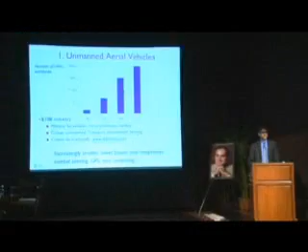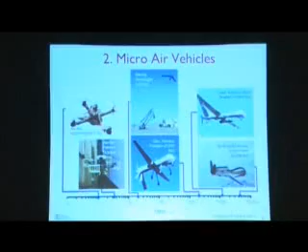The second driver for this work comes from the fact that these UAVs are getting smaller. So in this picture, you see on the right side the big monolithic aircraft used for military applications. But on the left side, you see UAVs that we're developing. So these are handheld UAVs ranging from about 1 meter in diameter all the way down to 20 centimeters or so, weighing about 2 kilos on the high end, all the way down to 75 grams at the lower end.

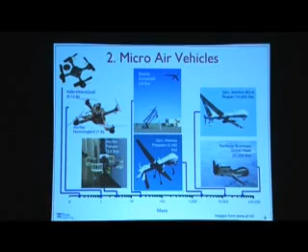The third driver of this work really comes from the fact, and Mr. Gandhi talked about this, there's not only networks of people, but networks of robots. And what I mean by that is really applications with large numbers of network computers, network sensors, network processors, and machines. And you can see it in autonomous platooning by Volvo. They're developing commercial fleets that are unmanned. Certainly in military applications, mining applications, manufacturing applications.

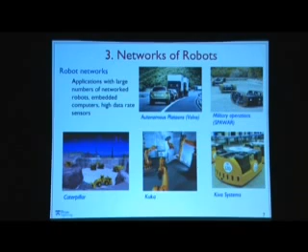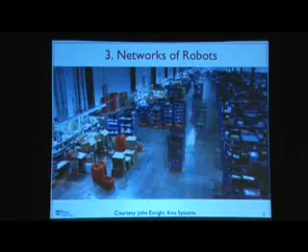My favorite, though, is this example from Kiva Systems. And let me play you this video where you're going to see hundreds of robots in a warehouse. And some of you may know that Amazon recently bought out Kiva Systems. So these robots are able to autonomously navigate, coordinate actions to avoid collisions. When a human operator, you see the person on the top, on the left side of the screen, you saw that a minute ago.

When that person asks for an order to be filled in this warehouse, she does not know which robot is going to respond, what pod has her order, how that robot is going to go to the pod, pick it up, and then bring it to her. All she knows is that she commands the swarm of robots with a fairly high-level request, and that request is always met in a timely fashion.

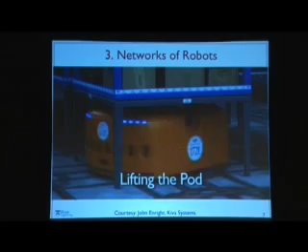What we're interested in, though, is developing networks of aerial robots, and more precisely quadrotors. So these are robots with 4 rotors, and therefore they're called quadrotors. And one of the reasons for pursuing these designs is because smaller truly is better. So if you look at the characteristic length, R, of this robot, you'll find that because the mass and the inertia of the robot scale as the cube and the 5th power respectively of this length, you'll find that the effective ability of this robot goes as 1 over R, which means the smaller you make it, the faster these robots can accelerate.

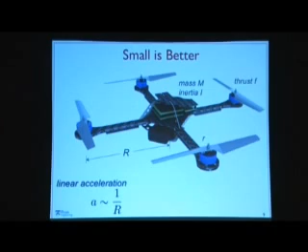And more importantly, the smaller you make it, the angular acceleration, the rate at which the robot rotates, differentiated once, goes as 1 over R squared. So that means these robots can be really agile, and you'll see this in the short video, where we have the smallest robot, a 21 centimeter, 75 gram robot, which consumes 15 watts of power, performing flips.

So these flips are performed in less than half a second, and the robot accelerates from 0 to 2,000 degrees per second during these flips. And there's an onboard processor that computes precise commands to the 4 motors 600 times a second to make this possible.

A slightly larger robot, and again, my former students have established a company called KMel Robotics, and this is a slightly higher end version of the same platform. Again, 4 rotors. The big difference here is there's a GPS on top and an ARM Cortex-A8 processor that does some of the high-level computation.

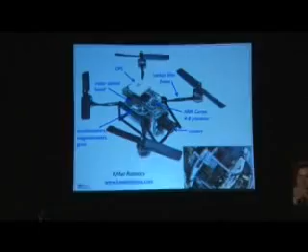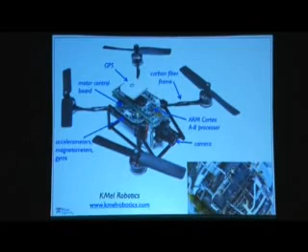And on the bottom right, you can see the surveillance video, which is actually being used for inspection in an industrial setting. So this robot uses sensors on board, accelerometers, magnetometers, gyros, to sense its orientation, to sense its translation, and compute commands to these motors to determine how to direct the robot to get more information.

So what I'd like to do today in the next 30 minutes or so is tell you a little bit about the challenges we face in developing it. I'm going to start by telling you about how we control it and essentially a quick introduction to the physics of these devices. A big problem we face is in getting these robots to determine where they are in the physical environment. This is the problem that we call localization.

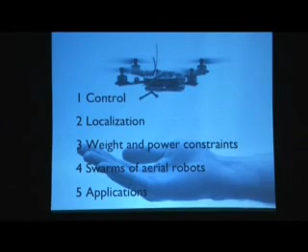Third, as you scale things down, one of the big things you have to circumvent are the constraints that are imposed by reduction in weight and then the resulting power. So smaller is not always better, and that introduces some constraints, and I'll tell you how we deal with these constraints. And then I want to tell you how we're approaching this problem of deploying large numbers of robots and applications for these robots.

So let me first start by telling you about control. So very briefly, as I said before, a quadrotor has 4 rotors, and you'll see that opposite pairs of rotors rotate in opposite directions. So 1 and 3 rotate in one direction, and 2 and 4 rotate in the other direction. If all these rotors rotate at the same speed, the robot hovers.

If you want it to rotate, all you have to do is take one rotor, spin it faster, generating more lift on the left and less lift on the right, causing the robot to turn. And if you want to turn it the other way, you do the reverse. You rotate the rotor on the right side with a higher speed and the left side with the lower speed, and you get the robot to pitch the other way.

So this very simple physics is used by the robot to stabilize itself. So 600 times a second, it's sensing its orientation and then determining how to stabilize itself to a horizontal position when the robot is thrown into the air. So this basic capability is very important, and it has to be very robust in order for the robot to perform robustly.

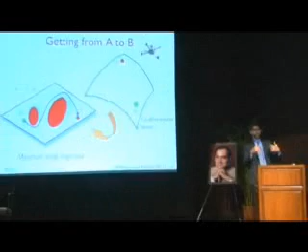So rather than do that, it turns out that there's an elegant transformation that you can do. You take this complicated 12-dimensional curved space and you flatten it out, reduce the dimension down to a 4-dimensional space in which you can actually transform the points A and B and find smooth trajectories that go around obstacles in the physical world. In particular, the trajectories we're looking at are called minimum snap trajectories.

The reason we minimize a quantity called snap, which, by the way, is a higher order derivative of position, is because we want the motion to be as smooth as possible and respect the dynamics of the aircraft. So once you find it in this lower dimensional space, which is fairly computationally tractable in real time, you transform it back into the complicated space and allow the robot to execute these motions.

So even though I'm a mechanical engineer, a lot of what I do and what my students do is develop software. And there are 3 levels of software that are required for these robots to operate. As I said before, the most critical thing is this inner loop where you essentially try to control the attitude or the orientation. You have to sense the rotation using onboard sensors, calculate commands to the 4 motors, and then the propellers to regulate the orientation.

The next loop that you have to worry about, and by the way, all of this is performed on board. The next loop you have to worry about is a position control loop, which again determines what rotation needs to be commanded in order to get to a desired position. And once more, you have to measure the position and compare it to the position you want to go to in order to execute this loop. So one challenge is, how do you get the robot to measure positions?

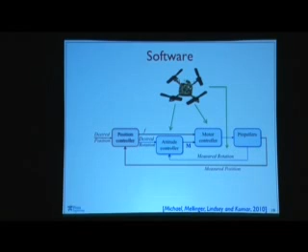One way of doing it is by using cameras. And in our lab, we have a system of motion capture cameras. So you see the infrared cameras on the top and the robot in this infrared capture room. It's receiving position updates 100 times a second in this position control loop. And then the outer loop is a trajectory control loop using the dynamics that I just described. And that is done on an off-board laptop, similar to the one that I'm using, which computes trajectories 20 times a second.

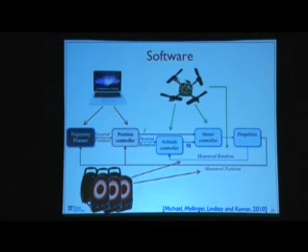And so you will see now a few videos that illustrate how the robot works. So this is my former student, Daniel Mellinger, who's throwing this robot into the air. Let me turn up the volume to give you a sense of sound. So regardless of how he throws it, this is the inner loop that's regulating the position. And the word basin of attraction is a technical term that basically tells you how robust the system is. So if you want it to stabilize from a larger error, from more wild throws, the larger that basin of attraction needs to be. And the key idea is if you shrink the size of the aircraft, you make it more and more maneuverable, and you make it more and more robust.

So next I want to show you what these minimum snap trajectories look like. So you'll see the robot going from point A, going to point B, and then going to point C and stopping there. And here you will see the results of the computation of this 12-dimensional space, then warp to the 4-dimensional space and going back again as the robot executes this minimum snap trajectory. Again, this is completely autonomous. There's no handcrafting involved. In fact, it is very, very hard to fly this robot with a joystick. In fact, in our lab, we don't have joysticks. They're practically useless.

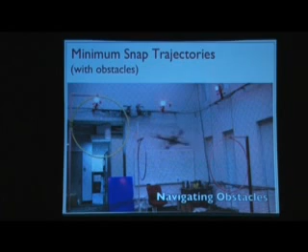The same thing you can do with these in the presence of obstacles, and you'll see this robot now going through these hoops that were placed in the environment. The robot knows where the hoops are, and so it can plan these minimum snap trajectories through the hoops. It doesn't matter if the hoops are actually moving. It can find the hoop and then execute a trajectory through the hoop. And again, these computations are done on the laptop between 20 to 40 times a second, and then by the cameras 100 times a second, and then on board 600 to 1,000 times a second.

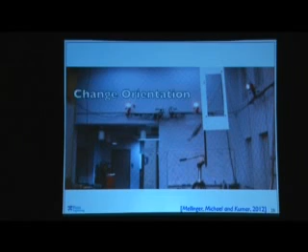Another thing the robot can also do is take segments of trajectories that it's learned and then stitch them together. So here you have an example of a robot that's trying to go through a window that is barely wider than the height of the robot. The only way it can do it is by taking its attitude and flipping it by 90 degrees to go through this window. So much like a diver can jump off a diving board and gain energy and then twist her body into a somersault, this robot does effectively that. It first gathers momentum, as you'll see, and then flips its body around to go through this window. And it actually takes these trajectories that it has learned and then stitches them together. So again, you gather momentum, you change orientation, and then you recover back to a hover position.

So in all videos, you saw the robot performing in a very, very carefully controlled laboratory environment with motion capture cameras on top. When we go into the outside world, we don't have motion capture systems. If I wanted to deploy the robot here, I wouldn't have these cameras. And the only thing that stops us from deploying the robots here is this problem of localization. I don't know where I physically am in this physical world.

So our first attempt to solve this problem without external cameras came in this form, where we took one of our quadrotors, we put two key sensors on board. So one is a laser scanner that sends out laser beams through a 270-degree arc and gets reflections back so you know where different points are in the environment in the plane of this laser scan.

The other piece of hardware, which you can now buy with an Xbox, is a Kinect platform. This is a color depth camera which gives you a cloud of points between 3 meters away and 5 meters away. So all of a sudden now the robot has 3D vision on it, on board, and it can actually start sensing the environment. And we can take the same software architecture that we had before with the 3 nested loops and do all the computations with onboard sensors.

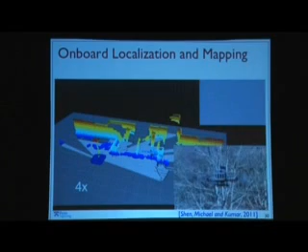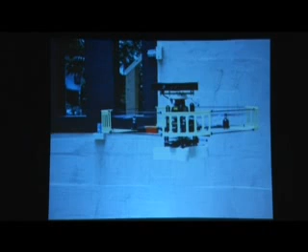Next, I want to tell you a little bit about the weight and power constraints. I started off by saying, well, we want to make smaller robots because that makes them more agile, more maneuverable. So if you look at this, the number one problem we ran into is to replace the motion cameras with onboard sensors, we had to put a laser scanner and then this Microsoft Kinect sensor and this is additional payload. And that made us use bigger motors, which in turn made us use bigger batteries. And of course, bigger batteries are heavier, so you need even bigger motors, and then even bigger batteries. So you run into the scaling problem, and then you end up with this fairly large robot which consumes almost half a kilowatt of power. Right? So that's unconscionable. But I'd like to tell you why.

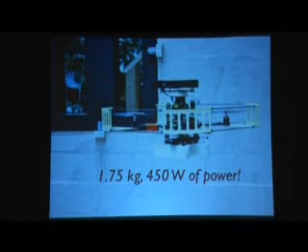So here's the power story, and this is the most depressing part of anybody who does anything with mobile anything, right? You know, when you have phones, laptops, power is always a problem. With the best technology we have, lithium polymer batteries, if you look at the specific power, which is the power per unit weight, and specific energy, the amount of energy density in a battery, and here I have data points of batteries that we explored just for the use of building these quadrotors, and we assumed we didn't have to fly for more than 10 to 20 minutes.

And the 3 robots whose videos I've just shown you are here, and you will see uniformly they consume a lot of power. In fact, if you look at the y-axis, you'll see they consume at least 400 watts of power per kilo. So that's a large amount of power. The other thing you'll see is that the batteries fall in this very, very narrow band. There's virtually nothing to the right side.

It's instructive to compare this chart with what biology has to offer. So here's a picture of adipose tissue, fat. All of us have some of it, some more than others. And you'll see that this piece of adipose tissue is off scale. You look at the energy density, it's 10,000 watt-hours per kilo.

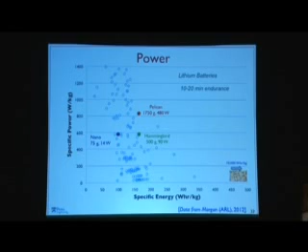If you look at the specific power, and here you can take your favorite athlete and ask, how much power does your favorite athlete produce? So for example, if you look at Usain Bolt, he produces maybe 2,000 watts of power and he weighs a little less than 100 kilos. But he only does it 10 seconds at a time. And we're talking about 10 minutes or 20 minutes.

If you look at Lance Armstrong, maybe he's not a good person to talk about today, but he consumes perhaps 6 to 7 watts per kilo on a sustained basis, 20 to 30 minutes. So the solutions that nature has to offer are just completely off scale, and we're nowhere close to that. In fact, the only example I can offer from nature that remotely comes close to the machines we use is the hummingbird.

So the hummingbird is the only bird that actually flies like an insect. It flaps its wings to hover, like our quadrotors hover, and in fact any kind of hovering device has the same kind of energy limitations and power limitations. So the hummingbird consumes about 200 watts per kilo, and all of a sudden our quadrotors that consume 400 to 600 watts per kilo start looking much better. But this is a problem. Anytime you build a hovering device, you run into the scaling problem.

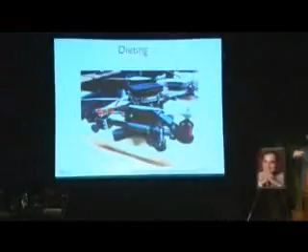So what's the solution? Well, the solution is you make your robots lighter. And so we have to put our robots on a diet. So what's the best way to put our robots on a diet? Well, you take off the heavy sensors like the laser scanner. So here I show you a picture with 2 cameras. This is the simplest form of sensor that you can use to triangulate features in the environment the way the laser scanner does.

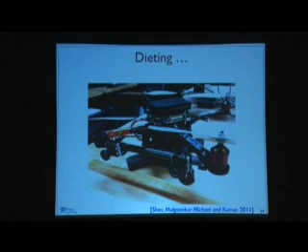And actually, if you look at any smartphone, in particular the iPhone, it has 2 cameras. It has a GPS on board. It has gyros. It has an IMU. It has pretty much everything that you need to fly except the propellers. So this solution is starting to approach something that we always wanted to do, which is to put wings on our iPhones.

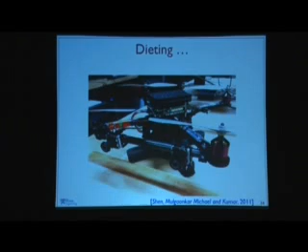So this robot is able now to fly autonomously. It's not quite as lightweight as the iPhone, but you can see this robot without any special markers flying. This is inside our lab. This is outdoors. In fact, in this video, you'll see the downwash from the propellers on the bushes. And on the bottom right, you'll see features similar to those pillars that I showed you in the schematic that are identified by this robot 25 times a second, and it's triangulating off these features, figuring out where it is with respect to the features that it sees.

And this video shows, on the bottom right, the video from the robot's viewpoint. So again, you see the features. Again, there are 2 cameras. The green features are seen by 1 camera. The blue features are reinforced by the second camera. But you can see this robot now pitching and rolling to about 40 degrees, traveling at 3 to 4 meters per second in our lab. So this is not quite as small as where we'd like it to be, but this is critical in order to make lightweight, swarm-like robots.

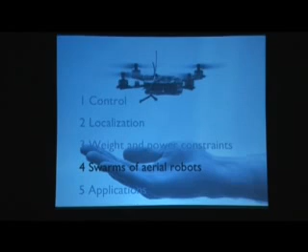So I want to move on and talk a little bit about our approach to building swarms. But before I do that, I want to motivate the fundamental problem in replicating these and coordinating many, many of these. So here's a toy example. So suppose I told you that we want to guide 3 robots to their goals.

In fact, I'm not going to tell you which robot needs to go to which goal, but I'm going to tell you there are lots of obstacles, and robot 1, 2, and 3 need to go to one of the 3 goals, each one. And so the first question is, where is the goal for robot 1, for robot 2, for robot 3? And there are many permutations. In fact, the number of permutations grows as a factorial of the number of robots. But once you decide which permutation, you want to plan these trajectories. So what's the complexity of this task?

So let's assume there are n robots, where n is a very large number, and m obstacles, where m is again a very large number, very complicated environment. So the first thing, which should be pretty obvious, is the state space I told you about, it grows linearly with n, right? And so in terms of numerics, in terms of computation, the growth is order n. The more robots you have, the more computations you have to do by a factor of n.

Worse, the number of neighbors that you have goes n squared. You know from social networks, the larger the network you belong to, the more complex that network is. The more complex it is for you to manage your interactions. That goes as n squared, the number of edges in your network. The number of potential interactions with obstacles goes as n times m. So you look at the complexity of this, and it's m times n plus n squared. And remember, m and n are very large numbers. So this goes quadratically with the number of robots you're trying to build.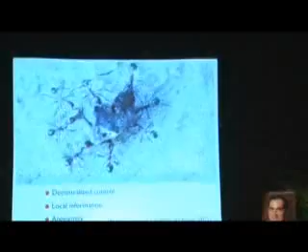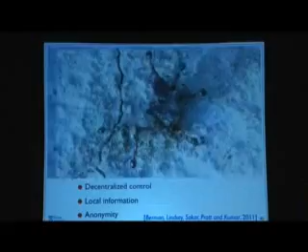In fact, these ants don't even have a leader. Each ant is making its own decision in a completely decentralized way. It's based only on local information. And finally, there's this paradigm of complete anonymity. They're agnostic to who their neighbors are, right? The complete opposite of the social networks that you and I live in.

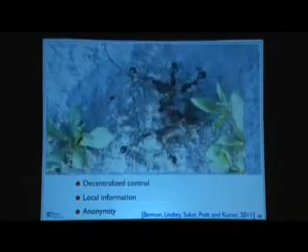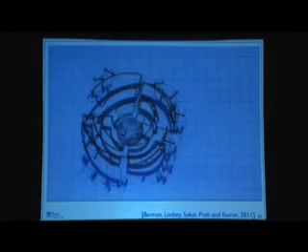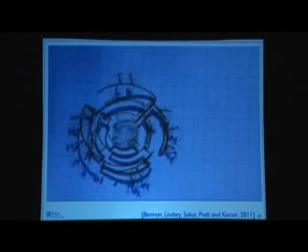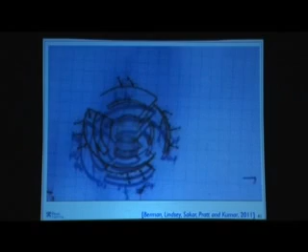And in fact, we've spent quite a bit of time studying these ants, and I want to show you a funny video. You can actually coax these ants to carry anything, provided you coat that with fig juice. And so here these ants are carrying an elastic object. And in this picture, you can see the elastic object deforming, and that tells you which ant is pushing and which ant is pulling and which ant is just goofing off and doing nothing. And there are many that are doing nothing. So we use this to study the roles of individual ants and how they signal each other. And we are using that to build better algorithms for swarming robots.

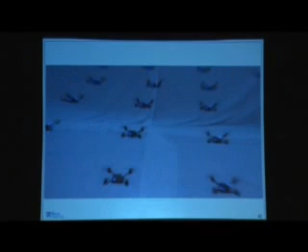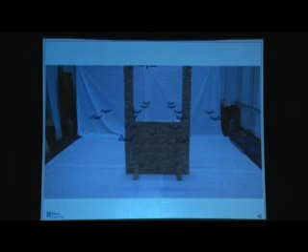But enough about ants. Let me show you a video of a team of 20 robots negotiating complicated environments and solving some of the problems that I told you about in terms of scaling up computations. So here's our 20 robot swarm. This is in an indoor environment, and they're essentially maintaining precise positions, relative positions with respect to their neighbors. They're tracing 2-dimensional, 3-dimensional formations, changing formations on the fly, and when they're confronted with an obstacle, they reconfigure their formation to fly through the obstacle back to the original formation.

Again, all this is happening with a combination of onboard computing and off-board computing and coordination between these robots. And here you'll see this figure 8, where these robots fly really close to each other, coming propeller tip to propeller tip, precisely controlling their interactions.

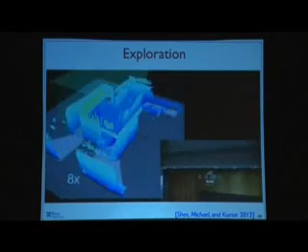So I want to conclude by talking a little bit about applications. What might we do with such swarms? Well, one of the biggest missions we'd like to conduct is what we call an exploration mission. So here's one of our bigger robots entering a building, and this time there's no human operator. We release it inside, and it's a three-dimensional building. We tell it to go in and tell us what the interior looks like. There's no involvement, again, with any human operator.

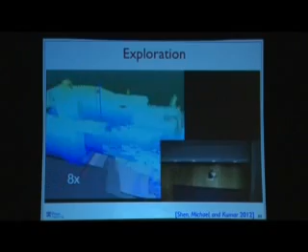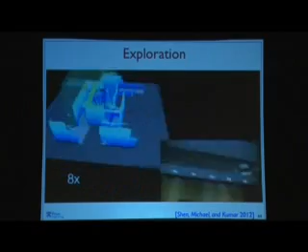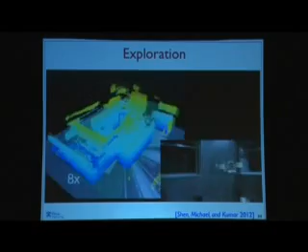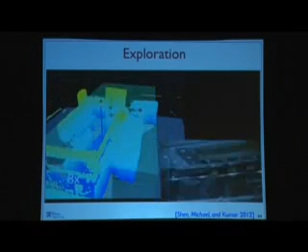And you can see that the robot is actually figuring out where to go in order to get new information. So it looks at this map of information and determines what would be the next most fruitful step. And it's doing that in addition to doing the mapping that I showed you earlier. So why might you want something like this? Well, you can imagine that there are many kinds of disaster response missions, search and rescue missions, or counterterrorism operations where you might want to just enter a building to see where the victims are, where the bad guys are.

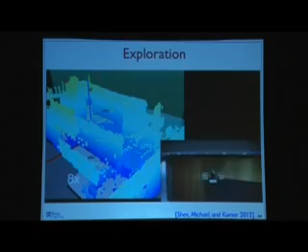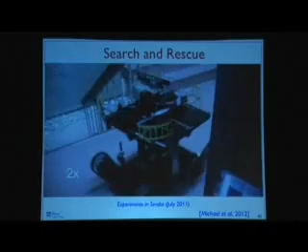So this is sort of a very fundamental enabling tool, which we can now do with one robot, but we really want to do 10 times as quickly with 10 robots, or 100 times as quickly with 100 robots. One of the things we've really tried to do in a realistic setting shortly after the earthquake in Japan, so this video was shot in Sendai in July 2011 in a collapsed building, and you can see this robot riding on another robot made by our Japanese collaborators in Tohoku University.

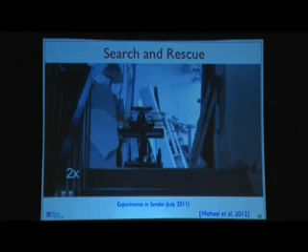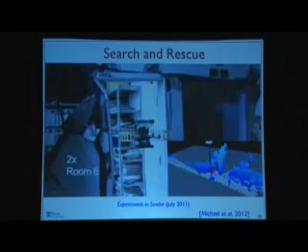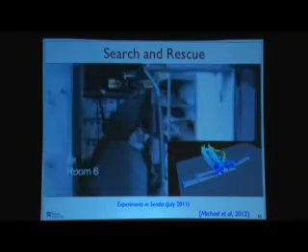And one of the reasons we like this collaboration between an aerial robot and a ground robot is because, as I told you, the aerial robots are power hungry. So whenever possible, they try to hitch a ride on the ground robot. But of course, when the ground robot gets stuck, it releases the aerial robot. That goes in and does the mapping inside. And here's a bookcase that was impossible to cross, and the robot just flies over that bookcase to see what's on the other side and comes back, all the while creating a map which is then displayed to the operator on the bottom right.

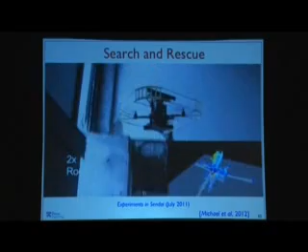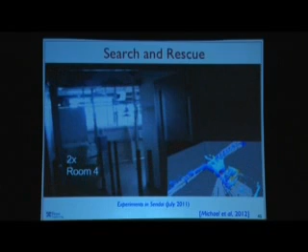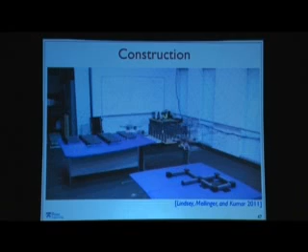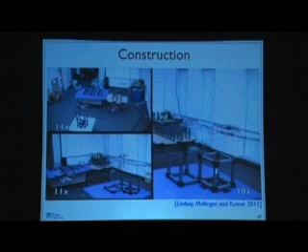Another application we're looking at is construction. So here you see these robots grabbing Lego-like modules with magnetic fasteners. So these are truss-like elements. The robots are presented a blueprint of the structure they need to build. And here you'll see 3 different sped-up videos of robots building different structures. And again, in this, the key thing is that the robots are figuring out who needs to go pick up what part and assemble it to what piece, while negotiating a common airspace, avoiding collisions, and doing it optimally.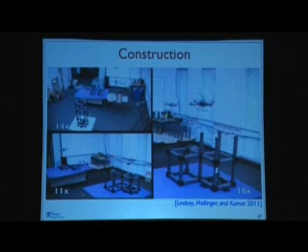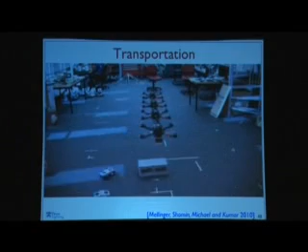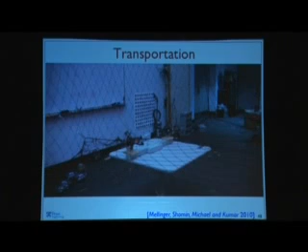Another example of a cooperative task you might imagine is just picking up things and moving it. As we build smaller and smaller robots, the payload carrying capacity of these robots decreases. And obviously what we'd like to do is to be able to carry big pieces, but by collaboration. So here you'll see robots coming in, coordinating to pick up an object, and they have grippers with nails at the end, so they can actually dig in and pick up things. And this is actually a wooden plank that the team is able to pick up and move.

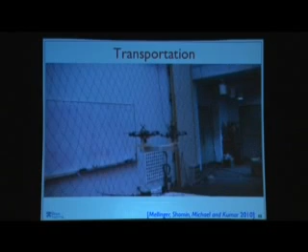So while we're on the subject of entertainment, let me share with you a clip from a late-night comedy show shot in the U.S. in January 2011, and the comedian here is Stephen Colbert, talking about our robots.

For years, I have been warning about the threats of robots rising up against their human masters. Well, now scientists have reached a new milestone in our enslavement. Flying robots that can autonomously assemble magnetic rods into simple cube-like towers. There's no remote control here, folks. These buzzbots have a hive mind of their own, and apparently the first step to enslaving us is building dorm room shelves. Which brings me to threat number 2, flying robot drones. Folks, today they're constructing a 3-foot tower. Tomorrow it's a sprawling prison for 3-foot prisoners. Provided they can build it before their batteries run out. And it can't be too windy. And even if they don't enslave us, they will crush us at Jenga. Vigilance!

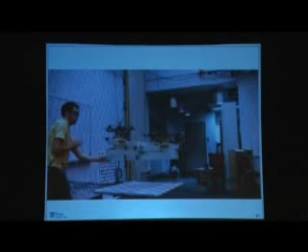So we rely heavily on communication. Communication's flawed, the whole swarm collapses. It's too complicated. Never do that again.

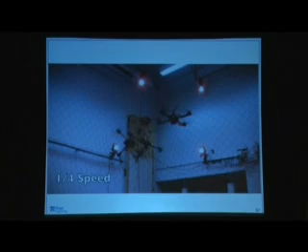This is what we call extreme robotics. The quadrotors are amazingly robust. One of the things I didn't emphasize is it's all built from COTS technology and integrated to keep things really, really simple. The only things that can get harmed are human fingers, and that's why we do these things in a net.

So let me just conclude by making several overarching points. I hope you'll agree that by building really small and agile robots, it leads to exciting opportunities and interesting applications. And one major thing that we have to struggle with are these size, weight, and power constraints, and that may determine the kinds of missions that we're able to execute. By having these robots cooperate and form networks, they enable novel functionality, in fact, functionality that we may not even have thought of.

And then finally, and this is not always obvious, but although we make physical things, you cannot underestimate the role that software plays. And this is important, particularly in a country like India, where in fact software is one of the things that does rule. So we estimate that 80% of the value we add is really in the software and the smarts.